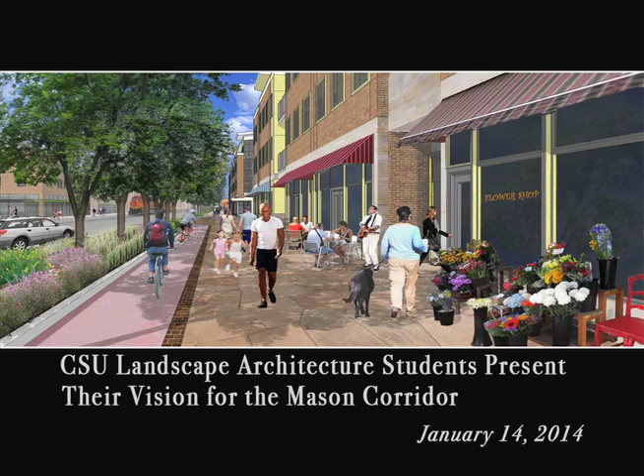This really is a product of the University Connections initiative, started a couple of years ago, to look at how Colorado State and the downtown area, the city, and the river area could make some positive improvements. There were a number of task forces, all from volunteers in the community interested in making this as positive and as grand a community as possible. It was really a think tank, and out of that came things like the Fort Zed, the Net Zero Energy District, which continues to work today, along with some initiatives about the Poudre River, bicycling, and so on.

Then University Connections said, let's reconvene and renew again, and so that's what we did in 2012, I believe. Task forces were formed, and another one was called the Infill and Redevelopment Task Force. This is what's really related to what we're doing here today. That task force focused on what we tagged as the Mason University District, looking at this area of the Mason corridor, from Cherry to about Prospect, and some area on either side, and how we could make that a vibrant, fulfilling, really grand area of the city.

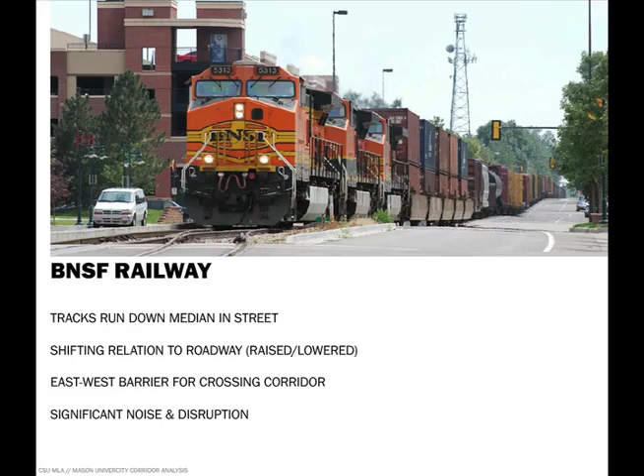One of the most prominent existing site conditions is the BNSF railway that runs down Mason Street. The tracks run beside Mason on CSU's campus from Prospect to Laurel, then shift north to a median in the center of Mason Street until curving off to the east just before Cherry Street at the north end of the site. The railway shifts from raised to lowered in relation to the street, representing a significant barrier for moving east-west across the corridor.

Much of the recent change along the Mason corridor has been due to the implementation of the city's new MAX bus rapid transit system. The MAX line is designed to provide timely, reliable public transportation along the Mason corridor, from the downtown transit center at LaPorte Avenue to a new south transit center along Mason just south of Harmony Road. This bus rapid transit line is just one way the Mason University corridor can become a multimodal connection between CSU and Old Town.

Next, I'd like to talk about our vision statement for this project. The concept of Building Links provides recognition to places, cultures, and elements not currently present in the Mason University District. It attempts to prevent future suburban and urban sprawl here in Fort Collins. We have focused on increasing the density of the Mason corridor to activate the already centralized populated areas of the city, providing comfortable and active cultural spaces, reclaiming our agricultural heritage, and providing safe and natural greenways for wildlife.

Next, I'd like to turn it over to Jason Owen, who will talk more about transit-oriented development. Hi everyone, I'm Jason. A transit-oriented development is basically a dense mixed-use development centered around a public transportation system—a dense mix of residential, retail, commercial, and recreation.

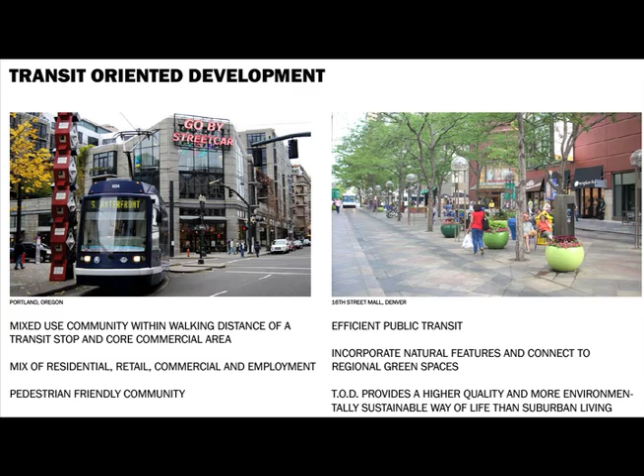There's a big emphasis on wide pedestrian-friendly walkways with landscapes, planters, seating, and lighting to make an attractive pedestrian environment, which then attracts business and growth to the area. This has been proven to create a higher quality and more environmentally sustainable way of life than suburban living. An example of where this has been done successfully is Euclid Corridor in Cleveland.

This is a downtown area that was pretty run down. The city invested money to build it up. They brought in attractive walkways, planters, landscaping, seating, and also an efficient bus transportation system, just to create a very attractive, successful place for people to use and experience the city.

Because this is a historic city, the architect really worked to weave the new landscape elements with the existing historic fabric, and the result was a design that unified the entire corridor but still has individual identities along the way. This corridor also runs through Cleveland State University campus, so the campus reoriented their master plan to better orient to the streets.

To capitalize on the growth that was going to take place, they created a unified landscape along the corridor through campus. There's two bus stops on campus which have become focal points and entranceways into the university. This project has been very successful, spurring lots of developments and growth for the city and the campus as well.

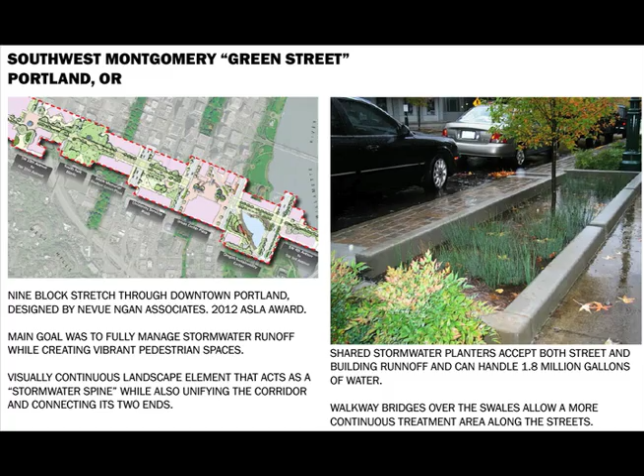And I would now like to turn it over to Rita, who's going to give some more precedents.

Hi, I'm Rita Manna, and I'm going to be talking a little bit about permaculture. Permaculture is a landscape design concept that was designed in the 1970s by David Holmgren and Bill Mollison. Together they created a way to change how we humans interact with our landscapes, produce food, deal with our waste, and care for our planet.

Their grassroots movement has spread to all corners of the earth and can be found in all climate zones, on every continent, and in every scale.

An example of permaculture can be found in the form of a food forest. Food forests mimic all forest aspects - the understory, the canopy, and the midstory, as well as its biodiversity. Only in this case, we're using only fruit-bearing or edible plants. They also place emphasis on utilizing vertical space rather than sprawling spaces.

Now, when we talk about implementing permaculture into our city here, we have to think about how that's going to help us economically as well as aesthetically.

Greenways are a huge economic boost to any city area. They create a unique sense of place. Shoppers feel more comfortable, they stay longer and spend more money. Trees provide shade which cools and buffers hot city streets, and they tend to attract new businesses and entrepreneurs.

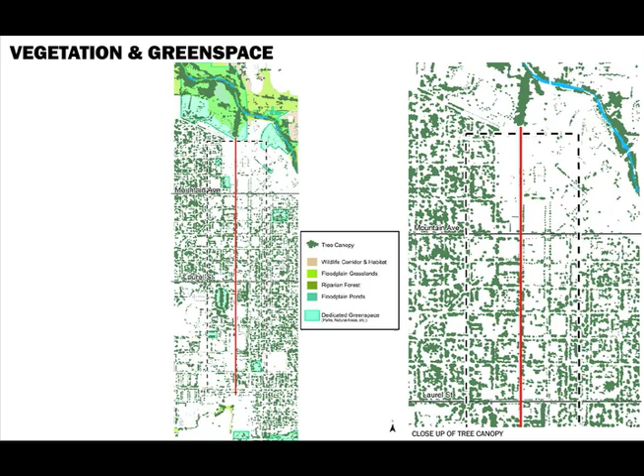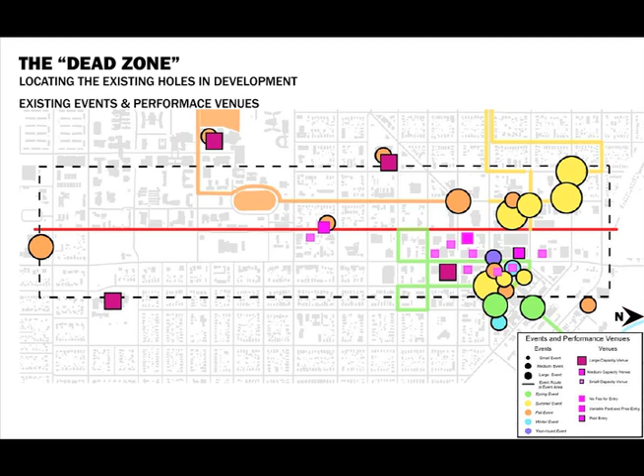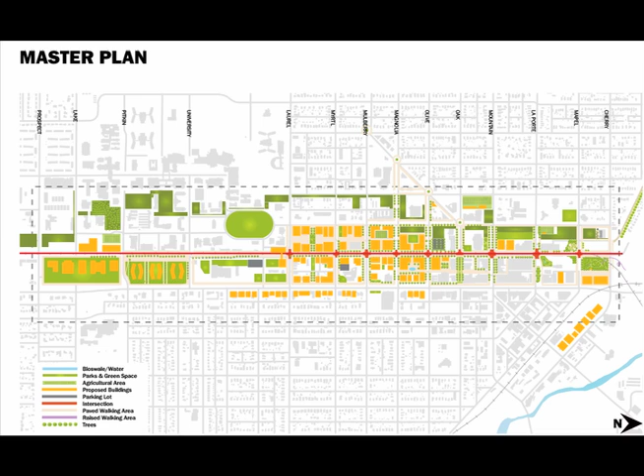Now I'm going to go over our master plan. Here we've combined the natural and built environment that seamlessly coexists with the urban framework of our district. Our three elements, cultural, agricultural, and natural, are combined to make a successful urban environment for both people and other living organisms. Upon observation of the current conditions, we noted three distinct zones within the Mason University corridor: the northern, the central, and the southern.

The northern zone includes Old Town and is part of the historic beginnings of our city. The central zone has sparse infill with a lack of identifying character and amenities. The southern zone consists of the university campus, which emphasizes forward thinking.

In the northern zone, we see great potential for strong connections with the built and natural environment. In this area, we would like to see the implementation of urban agriculture in the form of food forests and community gardens. We see a revitalization of the historic trolley barn, creating a railway museum.

We see the implementation of memorial parks to honor our founding individuals and cultures. And we would like to place emphasis on this area as a place for wildlife to connect to the Poudre River to the north.

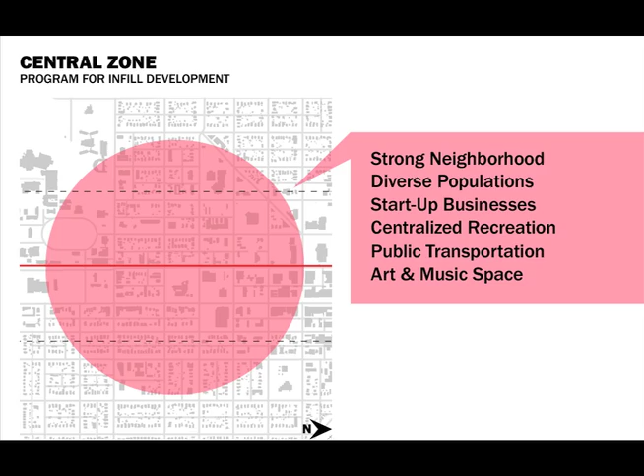Here in the central zone, we would like to see the implementation of dense mixed-use development. This would provide an opportunity to create strong neighborhood ties, encourage entrepreneurs to provide centralized public recreation space, and to display public art.

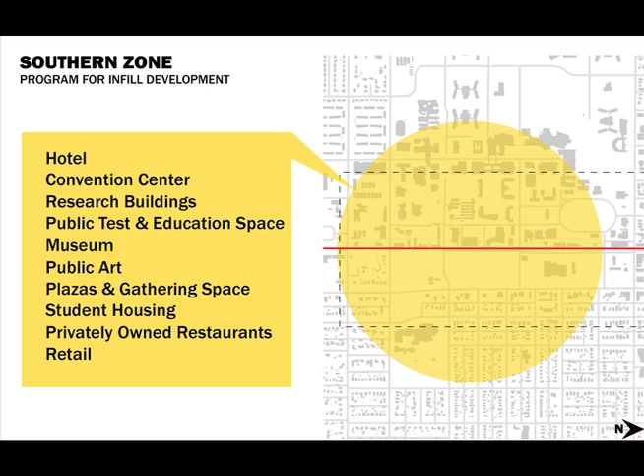In the southern zone, the university has the opportunity to showcase their innovative research and technologies in captivating and engaging ways. This can be done through the implementation of a museum, demonstration spaces, hotels, and other amenities.

To distinguish the different types of infill development found within the three zones, we would suggest building a variety of architectural styles. In the northern zone, future buildings would reflect the character of Old Town. In the south, we would suggest a more contemporary building style, which would reflect the innovative ideas of the university.

While maintaining consistency in building materials and aspects of current university buildings. In the central zone, we would suggest a mixing of both contemporary and historic building styles.

Now, this model outlines potential infill development for our master plan. Please note the concentration of infill in the centralized area.

So here we've outlined the major ideas behind our master plan. On the top are areas of great cultural importance. The center diagram shows locations of potential urban agriculture, and the dark green diagram outlines the wildlife corridor running through our site. The bottom diagram shows how these three systems are interacting with one another.

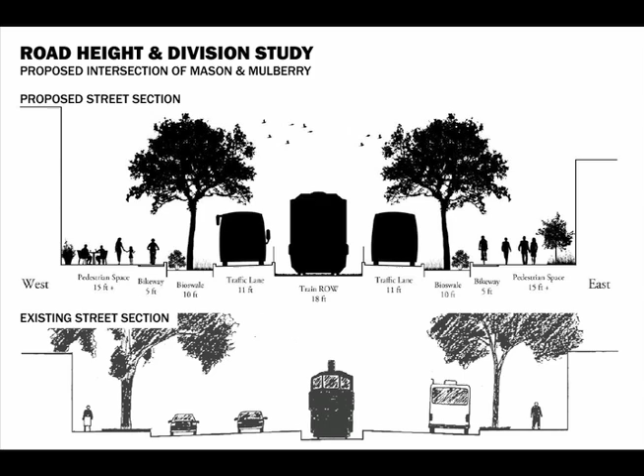Here you can see that we have altered the existing roadway to better incorporate stormwater infiltration, pedestrian movement, and bicycle traffic. I would like to point out that we have not eliminated vehicular traffic, but rather have reduced the width of the road to discourage vehicular movement.

Here we have a plan view of the potential intersection here on Mason Street. We focused on traffic calming measures to ensure pedestrian, vehicular, and bicycle traffic safety. To ensure that bicyclists were not plowing through intersections or speeding beside pedestrians, we have implemented these jogs to force the cyclist to slow down at each intersection.

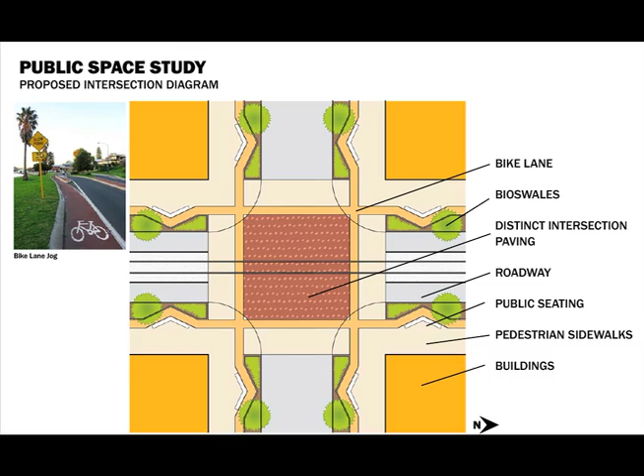So now that I've explained the basis behind our master plan, I've introduced three zones for development and have provided you with suggestions for potential street organization. I'll begin to speak about how we can encourage citizens to interact with our proposed new infill.

There were Native Americans, Japanese immigrants, Mexican Americans, African Americans, and European immigrants, which were among the first populations to inhabit this area. However, through the years, we have lost a great deal of our cultural diversity.

Diversity is the difference in ideas, morals, cultures, lifestyles, and goals. It is important to us because it helps us identify the differences between us and embrace them. By having an eclectic mix of people, it ensures a dynamic and vibrant community.

In this slide, I've analyzed the location of existing centers of art and culture found within the Mason corridor. As you can see, there's a strong collection of places on the northern end, with sparse locations further south, providing a spectacular opportunity to introduce more cultural spaces within the southern and central zones.

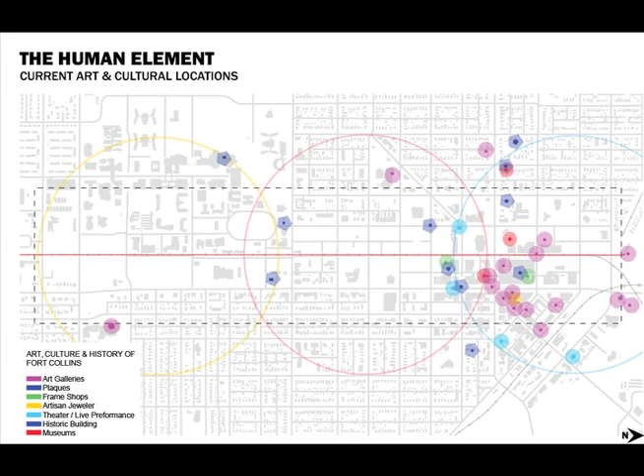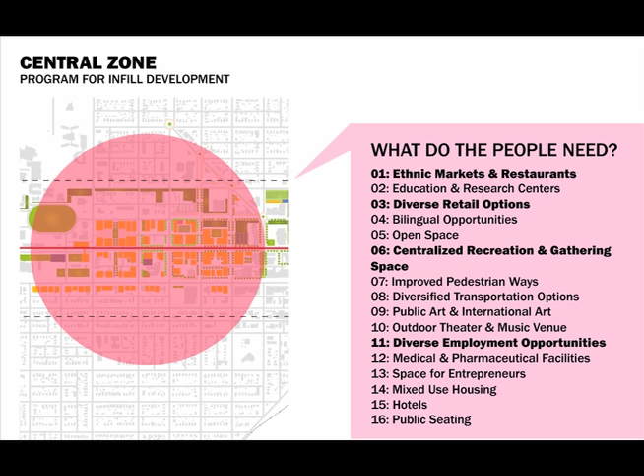So if we have these opportunities for centralized development, what's going to draw in our diverse population? What's going to bring people to our space? We need new retail options for various ethnic and socioeconomic backgrounds, diverse employment opportunities, ethnic markets, restaurants, and accessible recreation space, just to name a few.

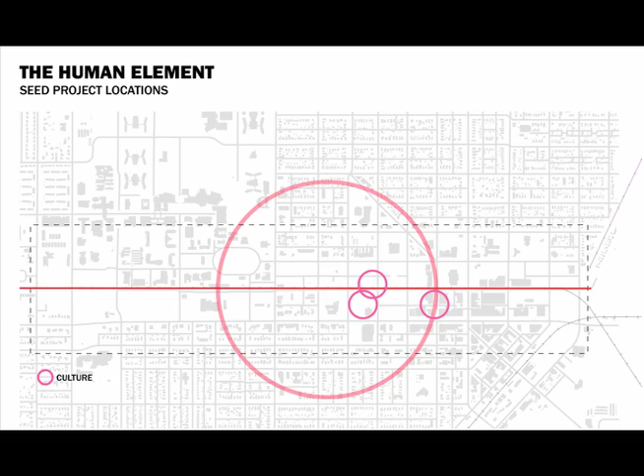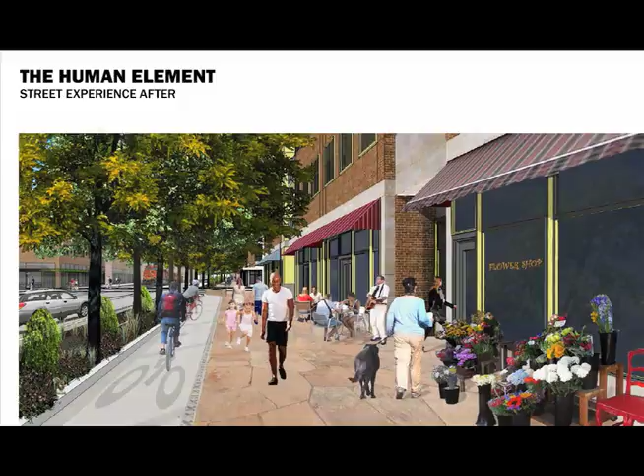We have repurposed the street parking in this area to be a delineated bike lane and water infiltration bioswale. We have widened the sidewalk, installed public seating, and created a rich sense of space. We've also widened the sidewalk for an opportunity for stores, restaurants, bodegas, etc. to spill out from the buildings onto the sidewalks, further engaging our pedestrians and bicyclists.

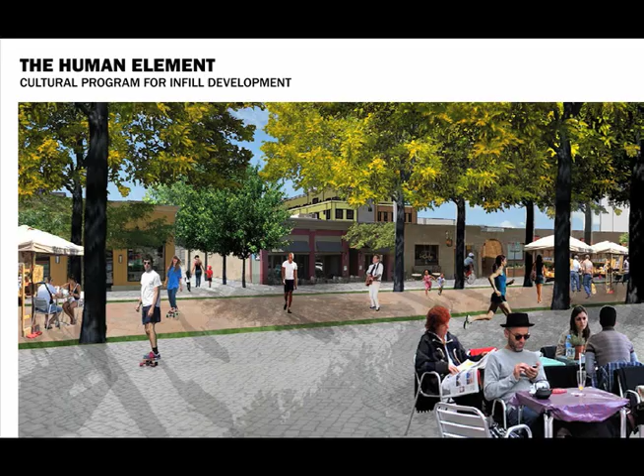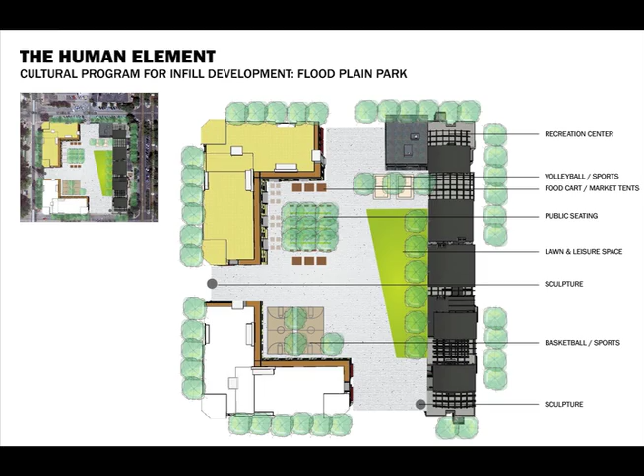And in keeping with the historic foundings of our city, Jason will now discuss ways in which we can incorporate urban agriculture into the Mason University District.

Fort Collins has a long history of agriculture in this area, from cattle and sheep ranching to wheat and sugar beets, and also apple and cherry orchards. So we felt it would be very fitting to tie back into this agricultural history and relate this into our design for Mason Corridor by using urban agriculture, things like community gardens.

There are many benefits to community gardens. Social benefits, just people getting out, working together, getting their hands dirty, getting in touch with nature and food. And it's good for the city, it can generate revenue and better food security, things like that.

This map shows our locations for proposed gardens along the corridor. Starting at the north end, we have the food forest, and then working southward, we've got a children's garden, a large community garden, a garden for seniors. And then in the dense part of our development, there'll be a lot of restaurants, so we can have small gardens for the restaurants to grow their own food and herbs. And then south on CSU campus, a garden for students, and at the far south end, a large research garden for CSU.

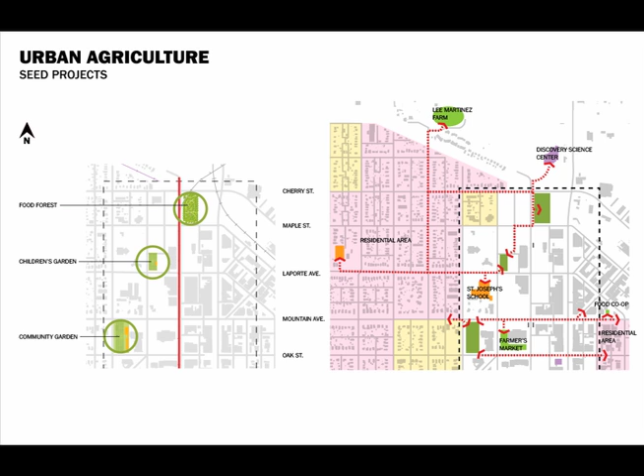The map on the right shows how these 3 gardens connect with important places nearby, such as local schools, the Discovery Science Center, and the farmers market on Howes Street. I created a series of diagrams to show what these 3 gardens would incorporate, the infrastructure they would need to function, and the types of crops you could grow there.

The children's garden is meant to be a place for work and education, where children can learn where food comes from and how to grow it. They can learn responsibility and work, and also have a place of play and creativity, where they can have fun while learning and working.

The food forest, as Rita mentioned earlier, is a place of multiple stories of food production. You have the canopy with fruit and nut trees, mid-story vines, grapes, berry bushes, and shade-tolerant plants on the ground level. You can also raise animals like chickens and bees here, and it can provide valuable wildlife habitat.

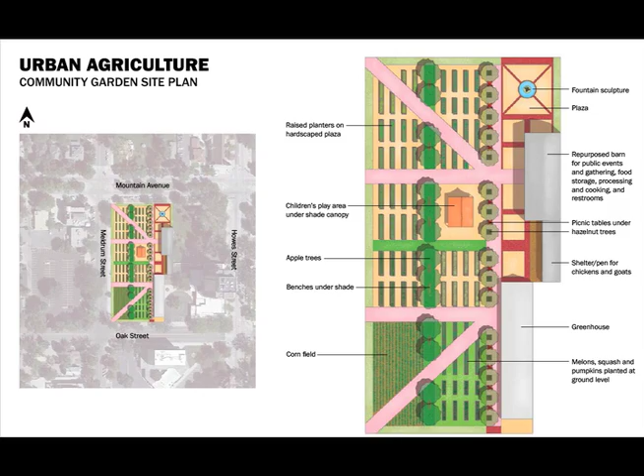This is a plan of what the community garden could potentially be. This would be a very attractive urban design garden that could be a community draw and focal point, as well as for producing food—attractive paving, raised planters, plazas, public space, and shade trees for sitting and resting. There'll be a large building for processing and storing food, and also for public events, parties, and dinners.

A greenhouse for raising plants in the wintertime. It could be a very attractive and productive place for the community.

Moving on to the children's garden. Like I mentioned before, this could be a very fun, interactive place. You've got planters raised in fun shapes, a play area for children, and a climbing tower where they can go up and look out over the city and the garden.

Animals can be raised here too—just a place that can be fun for children to enjoy and be creative while learning about farming and how to work and be responsible.

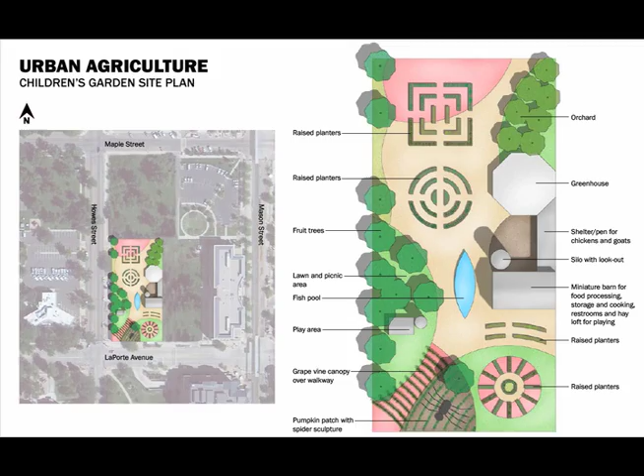And then finally, the food forest. This is located at the north end, and as I mentioned before, it has multiple stories. You've got paths at ground level so people can access food there, and then this really iconic canopy walk, which leads through the canopy, starting at the south end and working through to the north end.

This can be an attractive feature, enabling people to experience the forest at multiple levels and also harvest food in the canopy. The canopy walk extends across Cherry Street and then connects at the north end to the Discovery Science Center.

I'd now like to turn it over to Stefan, who will talk about the wildlife habitats.

I looked at opportunities for this district to provide not only for people, but also for wildlife. The Mason University District works as a possible opportunity to connect existing wildlife corridors around Fort Collins, specifically the Poudre River corridor in the north with the Spring Creek corridor in the south.

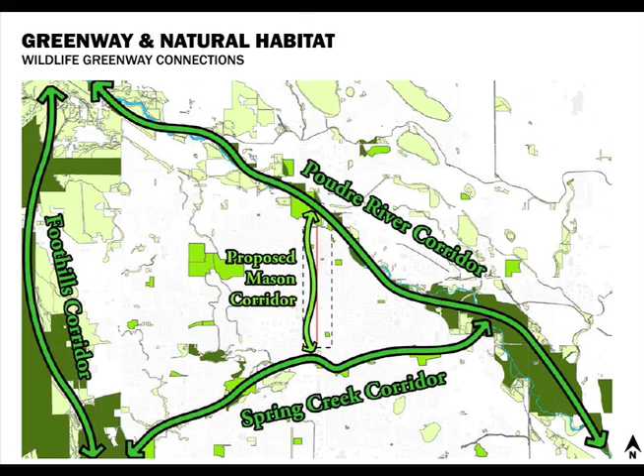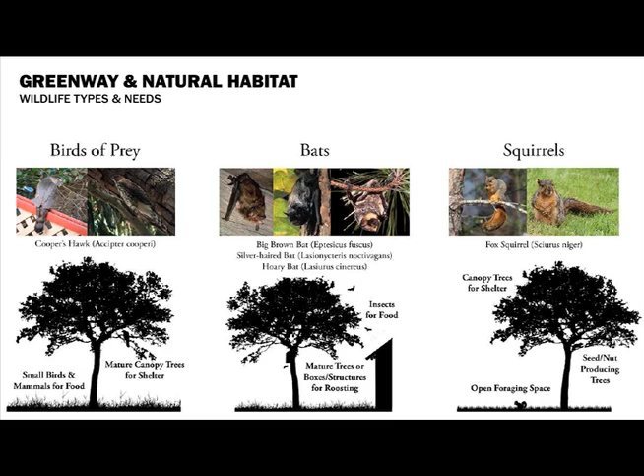First I looked at different types of wildlife that use the Fort Collins urban fabric, and the needs that would need to be provided to create habitat for these species—everything from insects through birds to small and larger animals, up to foxes.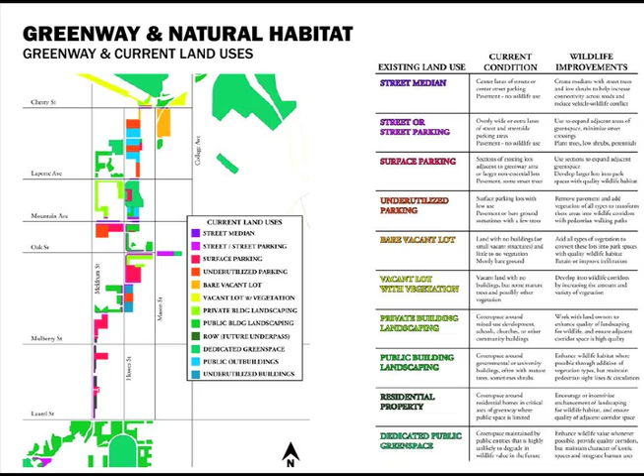On the bottom, the spaces are color-coded with their current land uses. Here's a close-up of the northern part of the site from Cherry down to Laurel. These different spaces have different strategies for turning them into wildlife habitat, everything from parking lots to already existing dedicated green spaces to the green areas around buildings.

I made a series of strategies for turning them from their current conditions to wildlife habitat, including when this corridor goes through more private spaces, working with the landowners to create incentives and different programs to increase the wildlife habitat and connect with the corridor.

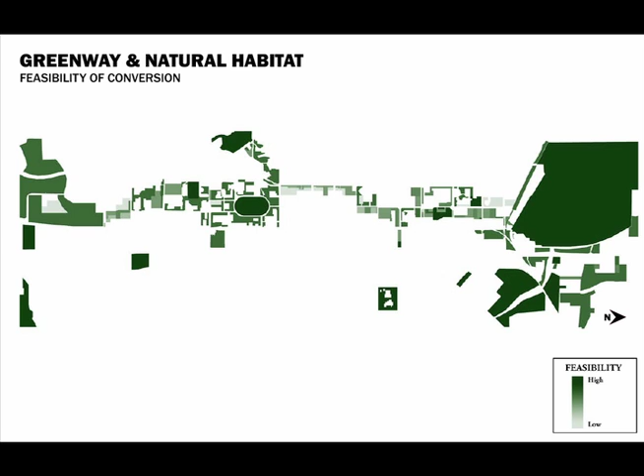So this is a map of the feasibility based on those land uses. The darkest green areas are places that are already existing dedicated green spaces, and the lightest areas are some of those areas that would be hardest to include in the corridor, including more privately owned spaces. This is a map showing the main wildlife movement through the corridor from the existing wildlife corridors

in the north and south. The smaller arrows represent connections with this greenway through the canopy network that exists through the urban fabric. The upper map here shows in pink the main pedestrian movement through the corridor and how this interacts with the wildlife movement through the corridor, as well as the street grid, to show areas of possible conflict between pedestrians, traffic, and wildlife.

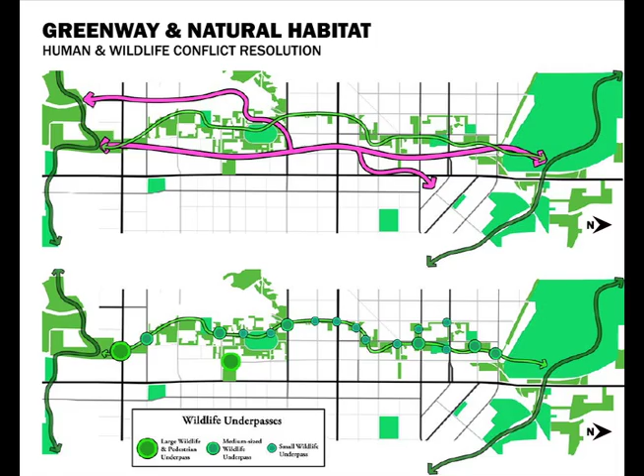On the bottom you can see one of the possible strategies for dealing with this is wildlife underpasses that allow animals to move across roadways without coming into conflict with traffic. Now these underpasses come in all shapes and sizes, everything from smaller culverts to larger underpasses that allow both pedestrian movement and wildlife movement.

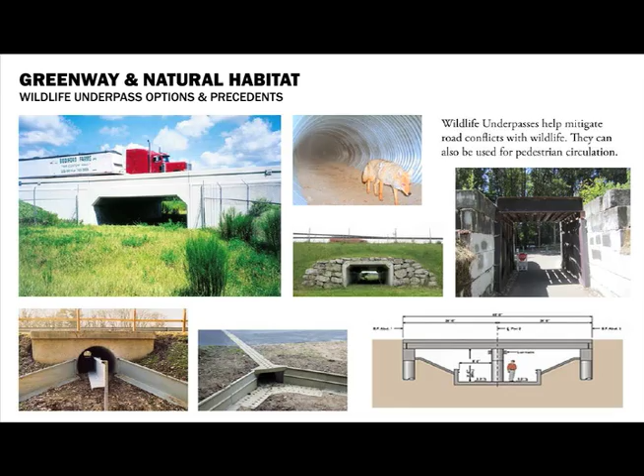Another strategy for these areas is to provide adequate signage, letting people know that these are areas that wildlife can be moving through, working with slowing down speed limits and just making sure people know that this is an area where possibly wildlife could be seen.

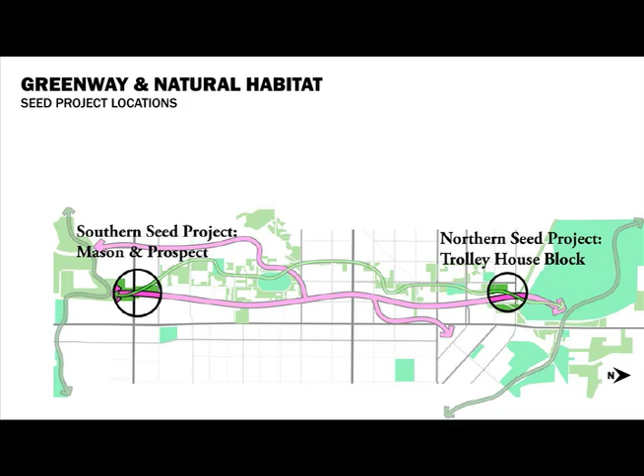So the two seed projects I looked at were at the north and south ends of the site, where this greenway connects with the existing greenways, and also these are areas where the pedestrian movement and the wildlife movement come in close proximity. So these are particularly important areas to look at.

At the northern end of the site, between Cherry and Maple Street along Howes, is a proposed area to connect from Lee Martinez Park and the wildlife habitat along the Poudre River down through the space using wildlife underpasses for the roads and also a lowered area for wildlife with high vegetation that makes them feel safer while still allowing close pedestrian movement through the space as well.

A section is cut through the underpass under Maple Street to show how it provides a continuous movement path for wildlife without coming into conflict with either the pedestrian walkways or vehicle traffic.

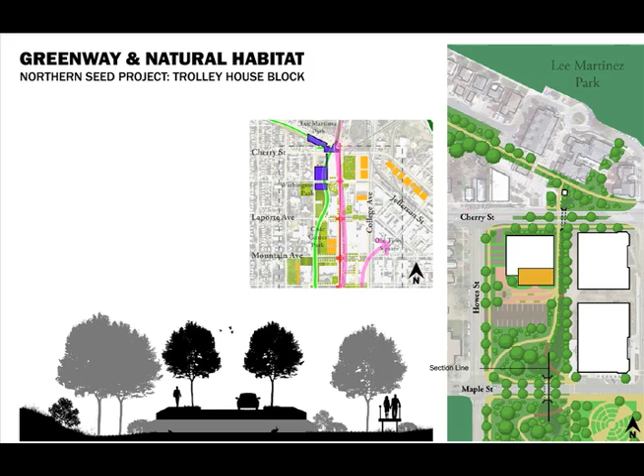Here's a possible look at what that sort of space could look like, with the lowered area for wildlife movement and increased vegetation to create more habitat and make them feel safer moving through the site.

So the other project is at the southern end of the site near Prospect Road, the busiest road in the area and therefore one of the most important places to create safe passage for wildlife as well as people, because I think a large underpass here could not only allow wildlife to connect down to the Spring Creek corridor in

the south, but could create connections for the Mason Trail for biking and walking so that people don't have to deal with the traffic of Prospect Road. They can just go under the underpass and continue on.

So some of our conclusions for our master plan are that we want to make sure that we provide diverse cultural spaces for people to interact, to create opportunities for urban agriculture to tie to our roots and to bring people together in that way, and also to provide not only for people but for wildlife as well moving through this space. I think there's a lot of opportunities for these things.

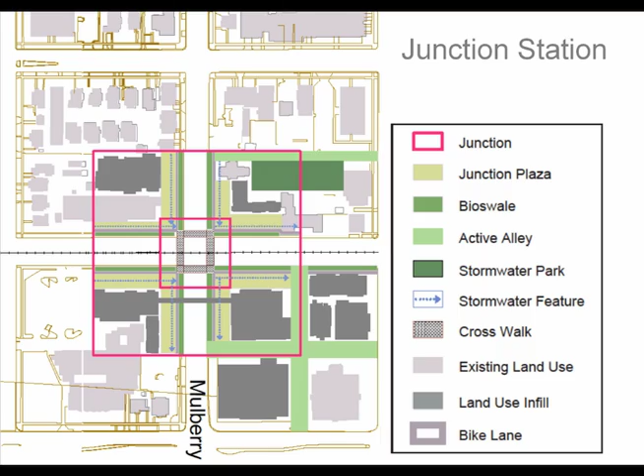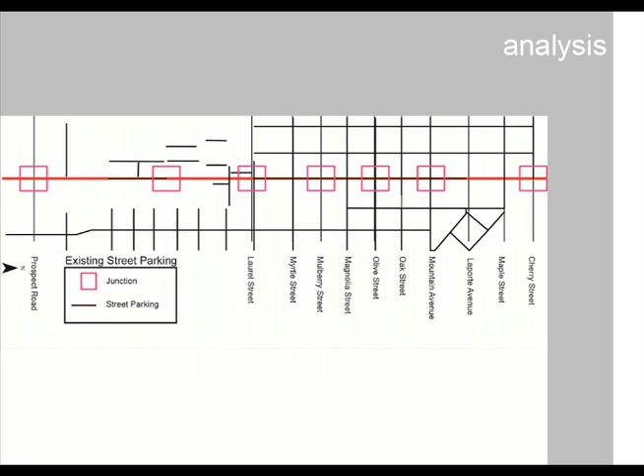So with this new development and infill, we can see a strong connection north to south.

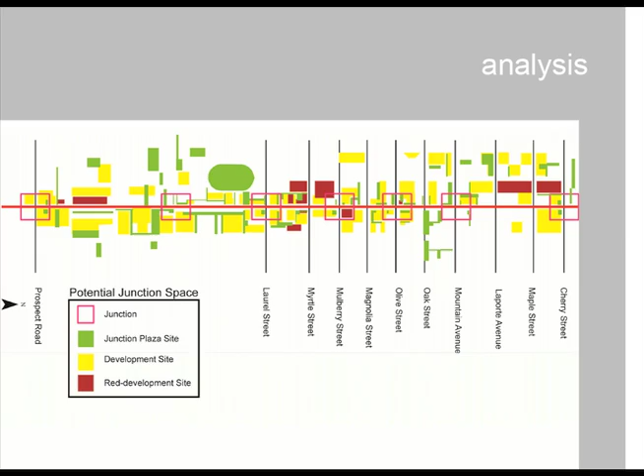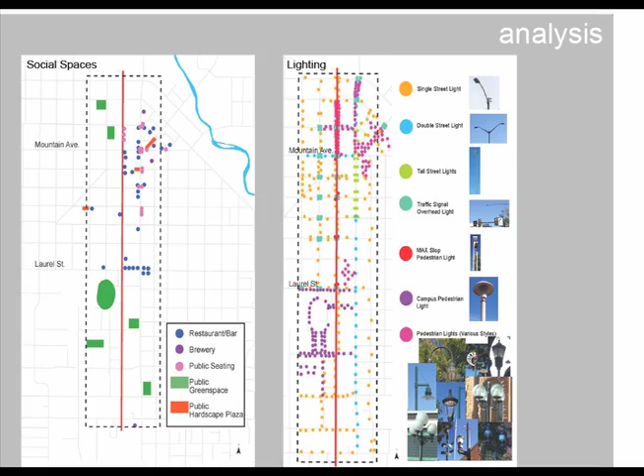Next, we wanted to look at the social spaces, including the public seating along Mason. During our analysis, we noticed there were actually only 3 seats on Mason Street itself for people to sit. We also looked at the lighting schemes throughout the Mason corridor, and there's quite a large variety of different light fixtures.

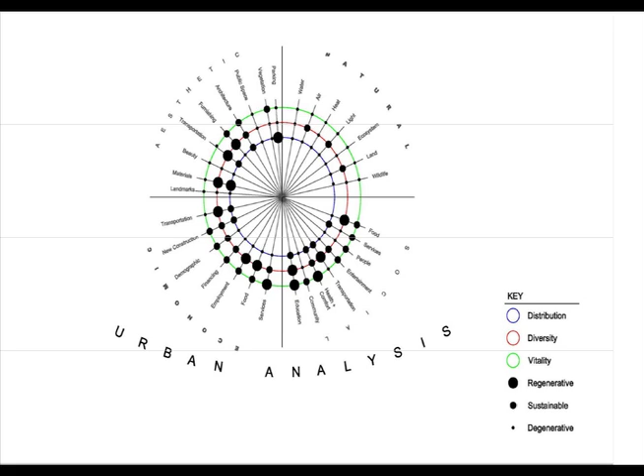So during our analysis, this is the lens evaluation of the current condition along Mason Street. We can see it's very lacking in the natural systems, and it's also lacking in the distribution of economics. The social services along Mason Street are concentrated in the north and to the south, so the community in the central zone is missing out on those opportunities.

So even though we're overlaying a similar design plan at each junction station, we wanted to maintain the character of each intersection. In the north at Cherry Street, we're designating that our Warehouse Junction. This is a place where we're taking old buildings and creating new purposes for them — a site where people live and work.

Next, moving down, at Mountain is our Civic Center. This is where a lot of municipality and county buildings are located. The Corporate Junction would be at Olive, where a lot of bank buildings are, commercial, and service industry.

And then at Mulberry is our Crossroads Junction. This is the junction that has the strongest connection to I-25 and our strongest connection east and west. Then the Laurel Student Life Junction is our place with the first connection to CSU's campus, where students can go to bars, bookstores, bike shops.

The University Junction is our first connection, a main gateway to the academic spine on CSU's campus. Then the last junction at Prospect would be our Research Junction station, where we're proposing new dormitories, new research centers, convention centers, and possibly hotels as well.

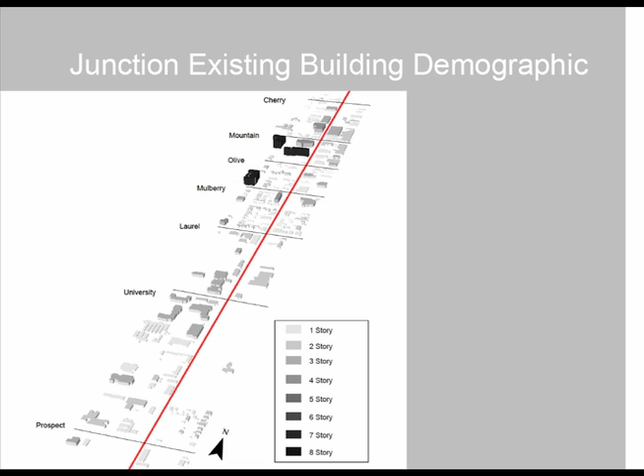We also did an analysis on the existing building height demographic throughout the corridor, and with our proposed new development, we wanted each junction to reflect that existing building height demographic. So we have our taller buildings down at Prospect as well as in the Corporate Junction, while maintaining that old town feel both at Laurel and Mountain and up to Cherry.

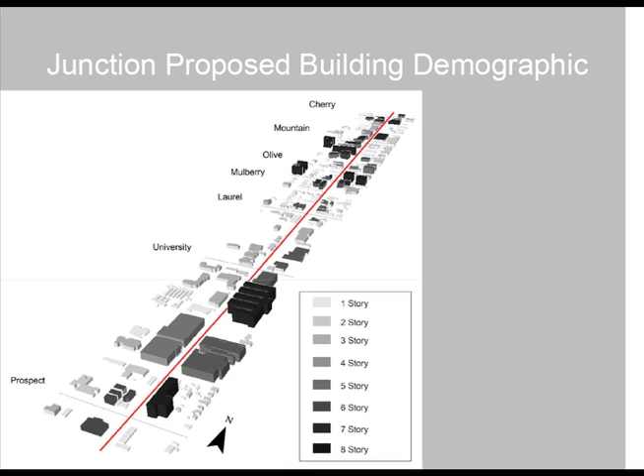This is our proposed land use infill. In the CSU campus, we're proposing new student housing to accommodate the CSU 2020 plan and their projection of students that are going to be occupying that space. At the Warehouse Junction, we're also proposing a grocery store that could be accessed from everyone along Mason Street.

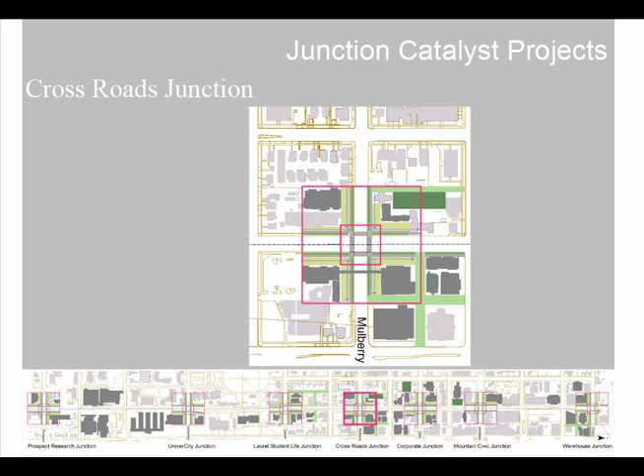So the first catalyst project to ignite this junction station idea would occur at the Crossroads Junction at Mulberry and Mason. Here we're proposing a hotel, parking garage with multi-use first floor, a skywalk to connect from that garage to the hotel, and new multi-family housing as well as commercial, restaurant, retail, and service area.

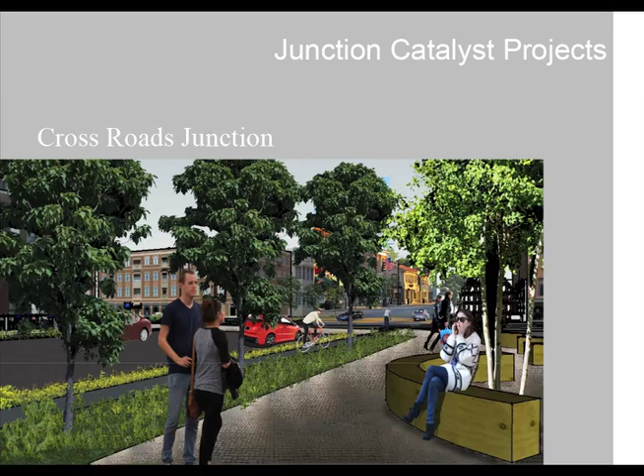The other catalyst project would occur at the Warehouse Junction. Here we're proposing more multi-family housing, as I said before, the grocery store with parking above the grocery store, and more museums. This is a place for families to reconnect, exercise and shop, with everything right there at their back door.

So next, Emily's going to talk about our water catalyst projects.

Part of our design for this project is to balance the goals of implementing a more robust stormwater system through the corridor and improving the pedestrian experience through this area. Together, these goals will combine to create greater economic development and greater stewardship of the environment.

A large portion of the corridor is inundated with high waters during heavy rainfall events. We're proposing to increase permeability through this area with the integration of biofiltration swales and permeable paving along the corridor and alleyways. We often think of Colorado's precipitation falling in the form of snow.

However, the greatest threat of flooding in Colorado is not snowmelt, but flash flooding from localized intense thunderstorms. These are events that take place over a short period of time, and these type of events are the focus of our stormwater proposals. Fort Collins has experienced a number of these floods over the years, most notably the flood of '97, when in July, 16 inches of rain fell over 2 nights. Estimated damages citywide were in excess of $200 million.

This first image is our stormwater master plan overlaid with the floodway through the city. This floodway identifies the places most at risk for flooding within our corridor and was used to determine where the swales and permeable paving located within alleyways and along city streets would be placed.

Alleys that fall within the flood zone will incorporate improved stormwater infrastructure to capture excess runoff. These amended alleys stitch together various users along the corridor, improving the way people are carried onto and through the site. By bringing vegetation into these spaces, we're focusing on the experiential aspects of traveling through these spaces.

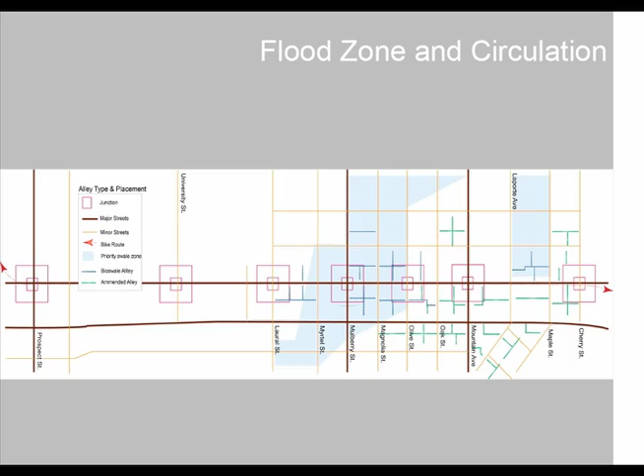To determine the location of amended alleys, we looked at where major streets intersected to reveal where the greatest volumes of people will be accessing our corridor, and thus where the greatest number of people will be served by them.

In keeping with our aim to improve the pedestrian experience, we want our streetscape to take on a distinct character. This character is defined by a linear street profile, which will allow sheet flow of water from impermeable surfaces into 2 bioswales on either side of the street.

In the circulation diagram, you will see we removed on-street parking along Mason Street to make room for the inclusion of bioswales and expanded sidewalks.

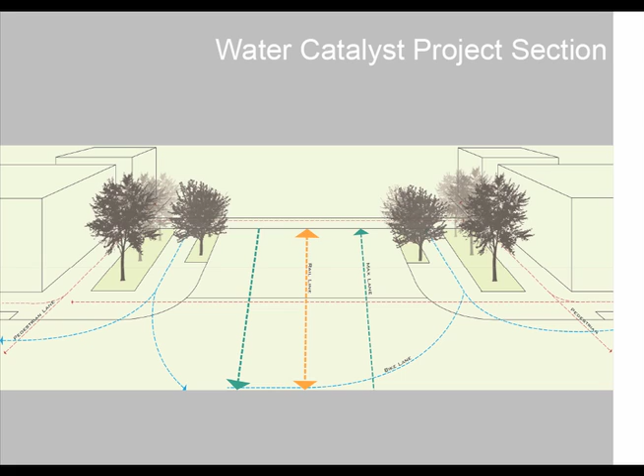Our bioswale strategy intercepts excess stormwater runoff during large storm events, alleviating the current storm drain infrastructure. The proposed bioswales and permeable paving through the flood zone will allow greater infiltration to occur, and plants and engineered soils included in our design will intercept heavy metals and biological toxins in contaminated stormwater.

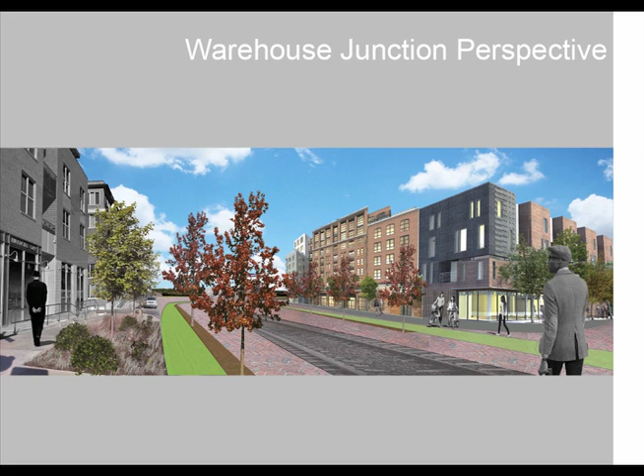We'll move now to the north end of our corridor for a look at how the streetscape will actually appear. This is a perspective of our warehouse district, our northernmost station stop. The grayed out building to the left is an existing one, and the building to the right is a proposed multi-use building that will be placed on what is currently an empty lot.

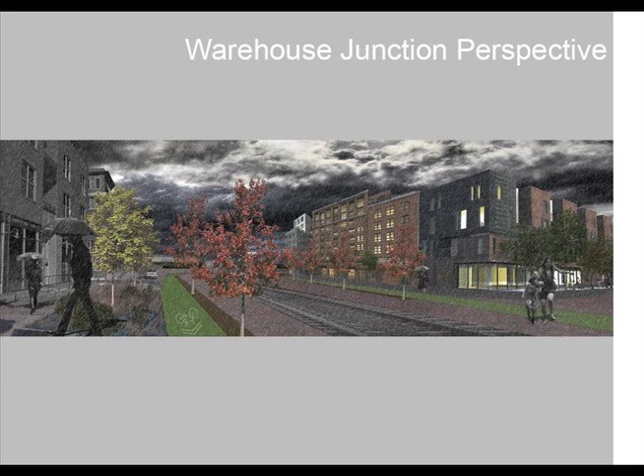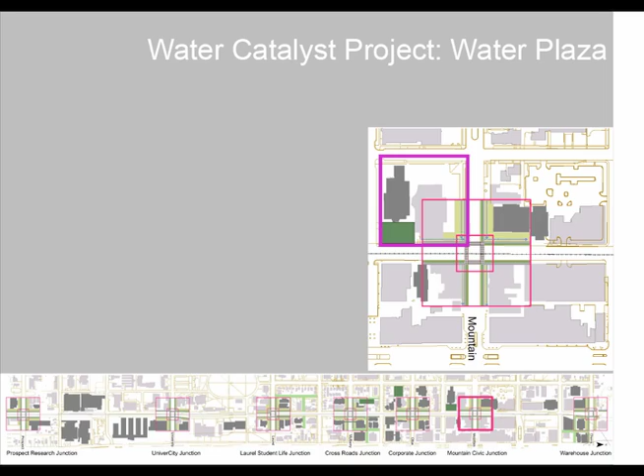We'll move now to the middle section of our corridor for a look at another one of our seed projects. As part of our scheme, we're proposing a plaza that will celebrate water through a series of tiered channels. This diagram looks at primary and secondary uses adjacent to this proposed plaza, showing how the space will be activated by different users at different times of the day.

This next diagram shows a connection between water flows and our site via the bioswales that line the streets. The water headed for the zone will be intercepted by these bioswales and directed towards our site.

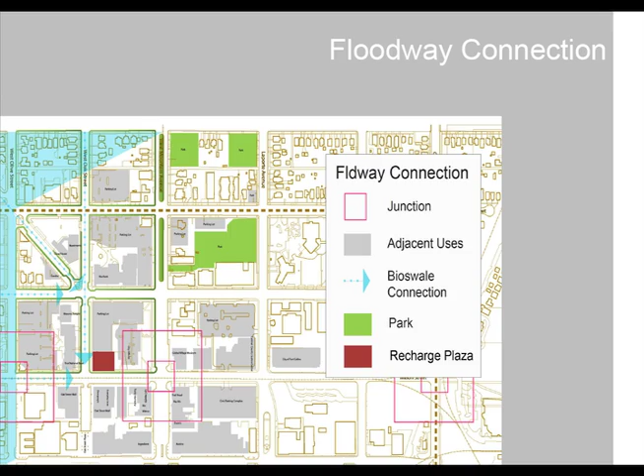The site is designed for water to flow in sheets over the plaza area and into the bioswales. When the bioswales fill, water will then flow out through the allotted slots and into an open channel, which will then carry the water to additional swales located along the streets.

One of our ideas for this plaza is to include solar panel shade structures, which will provide energy for the lights and the charging station on site. The ability to access free Wi-Fi and recharge laptops will draw users from nearby offices and restaurants during nice days.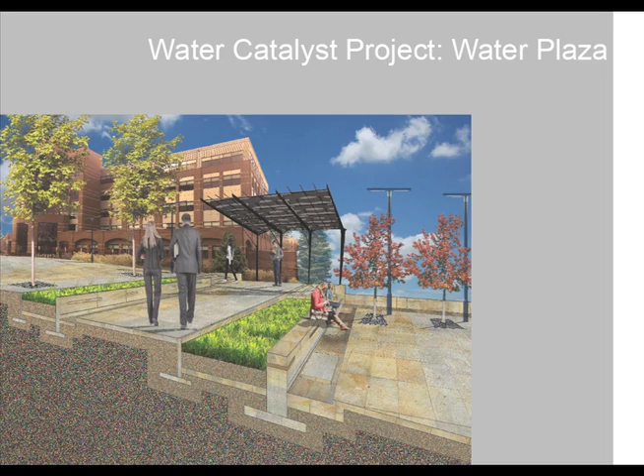On stormy days, water will flow across the plaza area and into indicated bioswales that will fill up and then spill into an open channel, carrying the water into swales located on the street level.

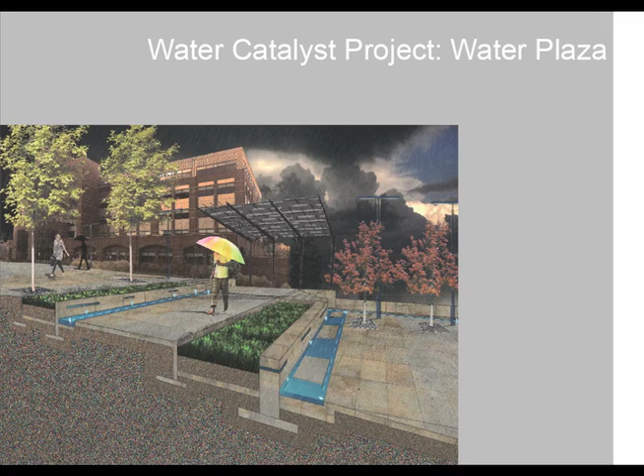Next, I would like to introduce Evan Moore, who will be expanding on our alleyway concept and carrying you through some more. Thanks, Emily. So as we've seen so far with our junction stations and with the improved streetscape and water improvement practices that Emily talked about, Mason Street itself has a new identity, a new look, a new feel that we think will really benefit those passengers of the coming Max line as well as anyone else visiting Mason Street.

So I'm going to be talking about some active alleys, some north, south, and east-west connections, taking people to and from these junction stations and these Max stops to other parts of the corridor. So we are aware that there was an alley plan done a couple years ago, and there have been some improvements to some of the alleys here in town.

And so we wanted to survey some of the businesses that were adjacent to these alleys to see what they had to say about the improvements and what their customers were saying.

There were lots of positive comments, lots of good things. Probably the top of the list was less smelly, so that's always a good thing to have in the city, as well as just the improved aesthetic of the alleyways.

Some of the cons: on Alley Cat Alley, the north-south access is cut off by some bollards, and for deliveries and things like that, that's kind of causing some problems for some business owners.

Many said that there's not enough seating. People were just passing through, not stopping to take in the surroundings, and so some more public seating, maybe some public restrooms, definitely more vegetation. Everyone commented about how great the upkeep of the plants is and how more of that would be just great.

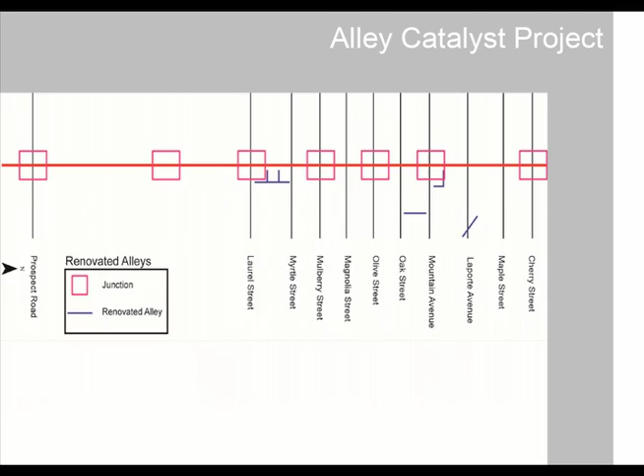These are the alleys that were renovated. As you can see, they're kind of spread out, probably set up in some hot spot, good locations to start with and hopefully expand. But as of now, many of the businesses we surveyed said they're just more beautified walkways. So we looked at all of the alleys and did quick diagrams to see what was out there.

For the alleyway itself, it's usually just an asphalt strip, not a lot going on - some trash collection, some deliveries, some occasional pedestrians. But really what we noticed is what's happening on the sides of the alleyways: the heights of the buildings, what's happening in those buildings. Lots of them are surrounded by big parking lots, or some are more vegetated than others. So really thinking about what's different about these alleys and trying to maximize those differences.

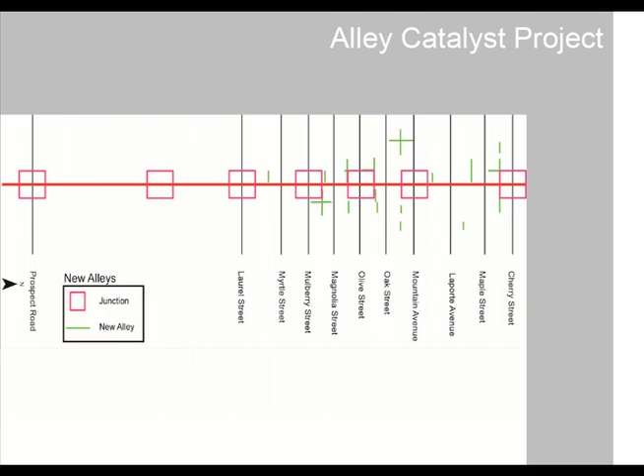So these are some proposed new alleys. As you saw for the existing ones, lots moved north to south. Here we decided to make lots of east and west connections, so people getting off the Max line, enjoying the junction stations and Mason Street, can move more easily east and west over to College, which is very popular, and to other areas of the district as well. Based upon what's existing as well as our proposed infill and redevelopment, we felt these would be good locations for alley expansion.

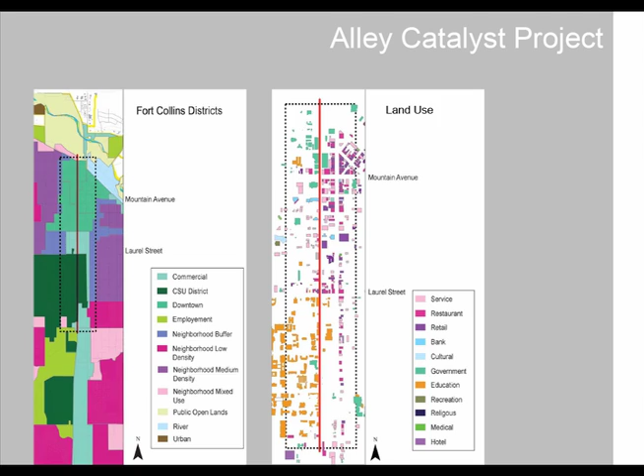So we looked at the land uses. We didn't think all alleys were created equal or should be the same, so we looked to see what was around them to try to tailor what the alleys can offer to the businesses and people surrounding them. So here we've come up with four categories of alleys. Instead of just having some paving, nicer lights, and some more vegetation, we thought - what could be different? What could we do to improve these alleyways throughout the city?

And then finally, the utility alleys. These are typically less wide, good for trash collection, for people driving their cars to their garages, deliveries, things like that - not really a place to stop and sit, but a place to move about.

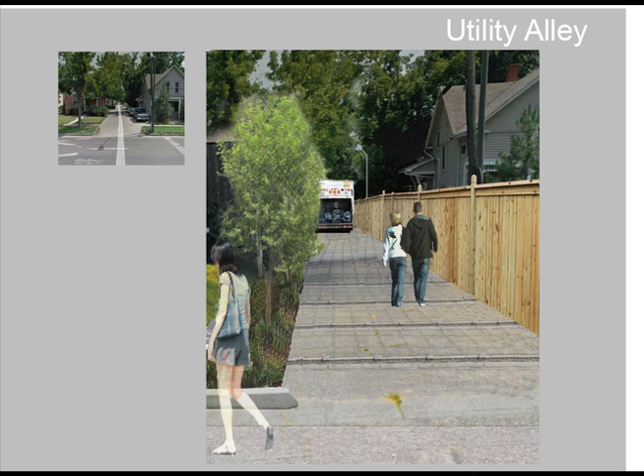So real quickly, we'll go through some quick ideas, a template of what some of these alleyways could look like. For utility alleys: permeable paving, some bioswales to catch the water and treat it as well, and very minimal lighting. We don't want to intrude on the residents along these alleys, but we need something to make it safe for pedestrians and cyclists to move about when the sun goes down.

For mixed-use alleys, again, these are probably wider, populated all throughout the day and into the evening. Again, permeable paving, and a huge increase in vegetation was one of the things we learned in our survey. We didn't want to block off the alleyways and make them only for pedestrians, deliveries, and trash pickup - so making that accessible, as well as creating space for outdoor retail and dining.

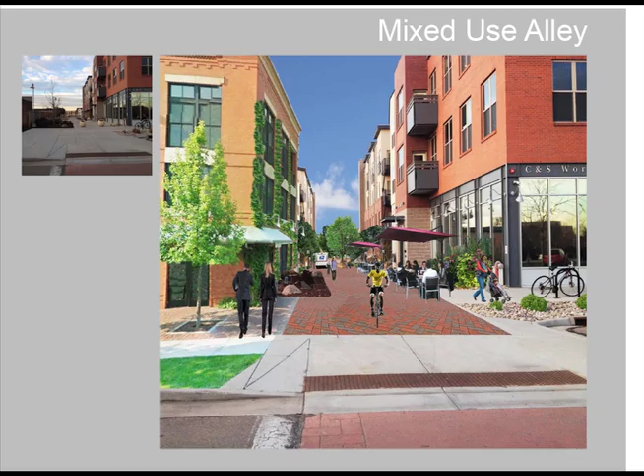Commercial alleys would be used really heavily during the week as well as on weekends - lots of places to sit, increase in vegetation aiding with stormwater management, and different paving to distinguish pedestrian routes from vehicles. Most importantly in these alleys, space for businesses to overflow into the alleyway, have almost a second front door, and hopefully attract more customers.

And finally, the nightlife alleys - again very useful during the day, but at night they can take on a different characteristic. The lighting can change, and businesses can bring out different furnishings to give it a different feel and create a different atmosphere at night.

So the two catalyst projects I worked on were up in the warehouse junction by Mason and Cherry, and then a commercial alley down by Mason and Mountain.

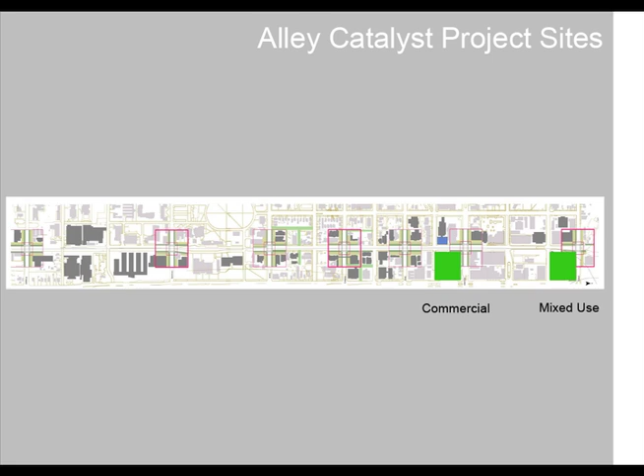So as Aaron mentioned, we're talking about putting a grocery store up here in this junction. There's not a lot of places for grocery shopping here in the district, and so adding something like that would be a benefit, especially if we're proposing more residential buildings in this area.

As you can see, there's a different color in the paving, the red and the gray, to distinguish where the pedestrians go and where the vehicles go, really giving the pedestrians the right of way. Again, these alleys will be busy all throughout the day and into the evening.

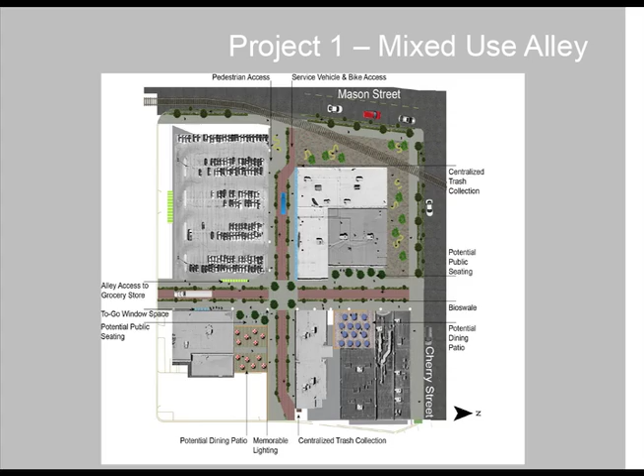So really providing a place where they can feel safe walking and can access the different businesses and offices from the interior. One possible option we've seen in our research of different alleyways is that the front of a restaurant is typically on the street, but then having some outdoor patio space or a quick pickup window for coffee or a waffle in the morning would be great for people working or living in these areas.

Another view, as you can see, we have the bioswales that Emily talked about that are on Mason Street coming into the alleys to create a cohesive feel all throughout the corridor. And again, for safety, dividing the pedestrians from the vehicles and bikes.

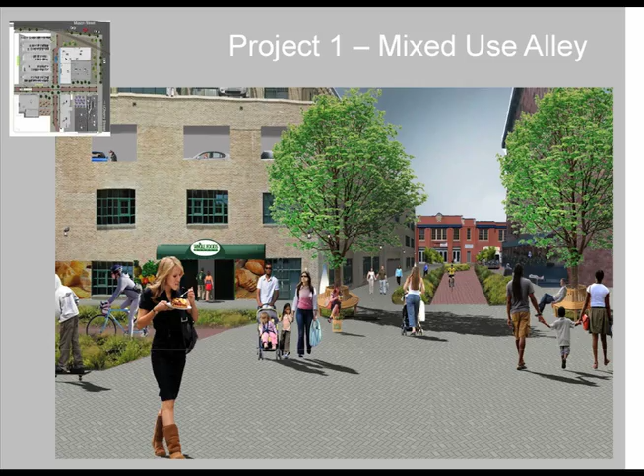The second project was a commercial alley, the block where Walrus Ice Cream is, if you know where that is. Again, different paving to distinguish who's supposed to be using those areas.

This alley in particular has a lot of space on the interior, and the good thing about a commercial alley — many of them share these same characteristics and sizes of interior space — is if you stand in the middle and do a 360, you can get a feel for everything that block has to offer instead of walking the whole block. So really making spaces for adults and for children to play, to interact, to shop, to dine.

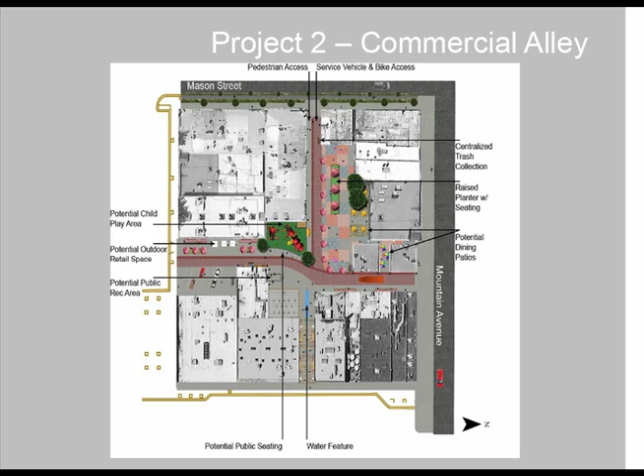Something in these alleys — I've been on basketball teams with coworkers before, and we play against the other businesses nearby. One of the things we learned from the survey was that people aren't really embracing the alleys or working together in the block to make them a success. So something like this, a place where people can go on their lunch break to shoot hoops, relax, shop, or dine, would be beneficial.

And then again, these larger spaces — a playground for children, outdoor retail space — bringing the great things that Fort Collins has already done, like the Pianos About Town, into these spaces so that the entire University District is cohesive.

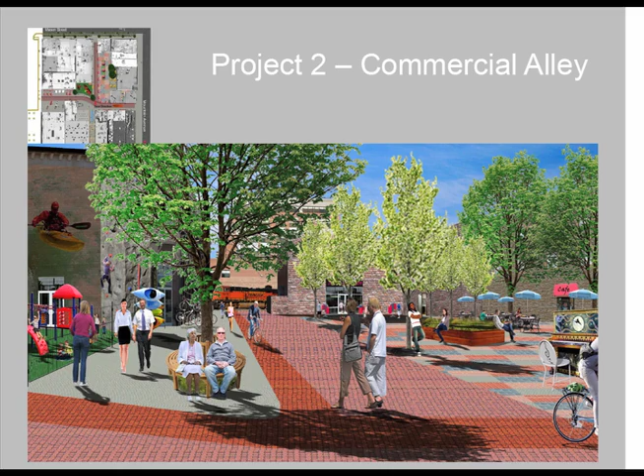And so with a space this big, something other cities have done as well is have a cooperative of the buildings, the businesses, and the people within these blocks. On a certain weekend they can get a permit, and all the restaurants can get together and say, we're going to have a taste of Fort Collins in this block.

And they can kind of take over that alley. There's an art gallery — they can set up shop for an evening or a weekend and have outdoor art displays. Again, another thing to get businesses and people into these alleys and excited about them will help make them more of a success.

Our lenses wheel, as Aaron mentioned, is really deficient in the natural and places for improvement across the board. What Aaron talked about with the junction stations really improves the aesthetic and social aspects of the site. Emily, with the improved streetscapes along Mason and thinking about stormwater management, definitely improves the natural and aesthetic look of the University District.

And then the alleyways — places where people can congregate, socialize, and hopefully another opportunity for businesses to maximize the space around them to improve the economic factors.

And so with these three sets of seed projects and the overall master plan along Mason Street, we believe that riders of the future Max line, residents of Fort Collins, as well as people visiting for the first time, will really recognize where they're at once they enter Mason Station, and it can be a vibrant place where people can enjoy and thrive. Thank you.